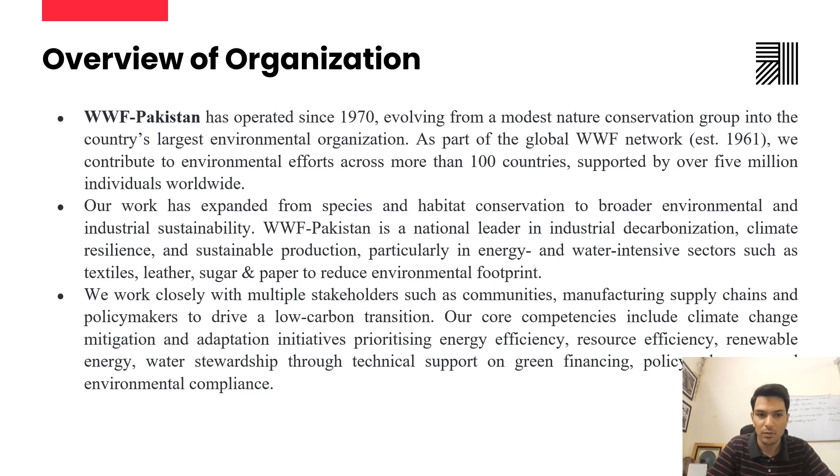The solution that we propose is that we want to bring about the change by diverting the load from the fossil fuel based energy demand to electrification, and our electrical grid is low emissions, so we want to have the heat pump integration as a scalable and cost effective decarbonization strategy for Pakistan's textile sector, which will ensure economic, environmental and reputational gains.

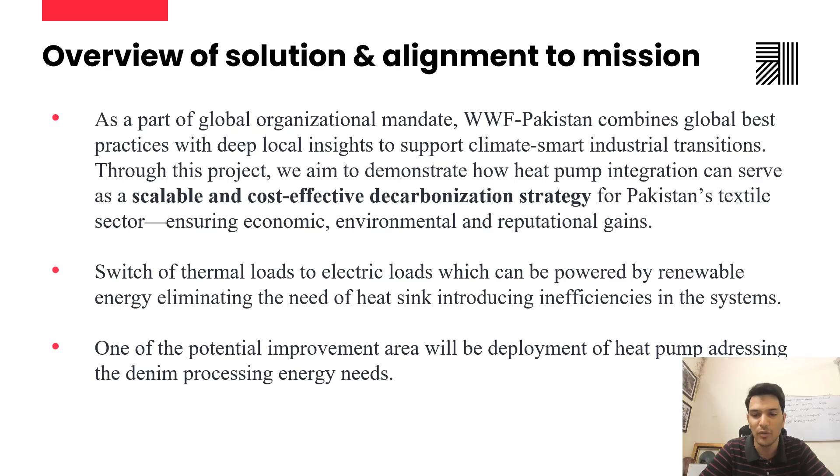So the primary objective of the solution is to shift thermal loads to electrical loads, because the thermal loads result in higher GHG emissions in contrast to the electrical load, which is mostly based on renewable energy or from the grid, and the grid has lesser emissions because we have a greater chunk of production from the renewables. So one of the potential improvement areas will be the deployment of heat pump solutions in the denim processing.

So the grant project aims to conduct a detailed feasibility study which will comprise of site visits, meeting with the project team, collecting verifiable data, and we will be analyzing and conducting the on-ground surveys, and then we will carry out the engineering sizing of the heat pump solution, what size will suit for the electrification, and then this engineering design will help us assess if the proposed solution will be economically and environmentally viable or not. If the heat pump solution is found feasible, the project team will then provide implementation support to the denim mill through the vendor selection.

We have done our base work, research, and we are better positioned because we have a background of carrying out environmental energy audits in more than 100 leading exporters in the country in the past decade.

So after the performance review, we will build a business case for the wider uptake, because we have direct liaison with many of the textile associations in the country, and we believe that there is a greater chance of scaling up this solution for the wider uptake to the entire sector in their value chain, starting from the ginning, the weaving, then the textile wet processing, garmenting, and then cut to pack solution. So in the entire value chain, starting from the processing till the finished good, there is a great potential of environmental improvement in terms of GHG emission reduction.

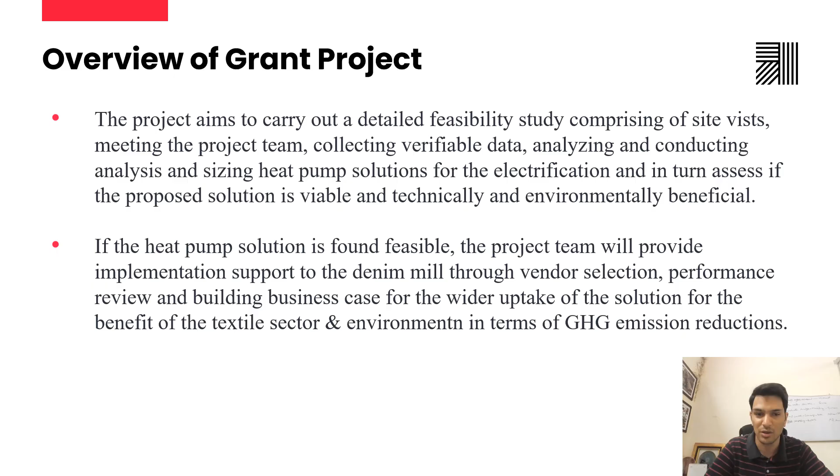So here is our project plan, the Gantt chart, which shows the list of activities that will be carried out. The first activity will be site investigations and data collection, and then we will proceed towards on-ground energy audits, which will be carried out at the denim mill situated in Karachi, and then the feasibility study and cost benefit analysis will be done, where we check the ROIs. The system design will be done: what size of heat pump will be suitable for electrification, what GHG emissions will it offset, and how will it go beyond the conventional solution.

Then the vendor will be engaged and the project will be executed from month 5 to month 11. And once it is done, we will have the performance evaluation of the heat pump and the solution. Once it is there, it has to be evaluated and the performance reports will be generated to see if it is going to deliver the intended outcomes.

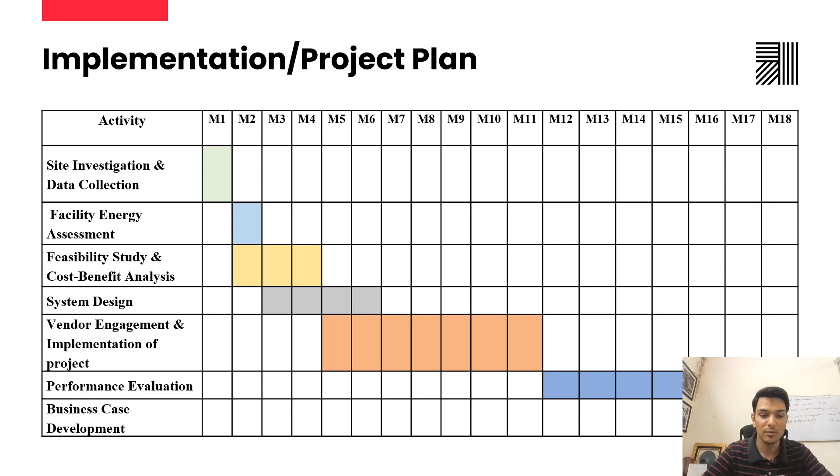And at the end of this performance evaluation, we will develop a business case with the project sites team, and then we'll have dissemination sessions for the wider audience so that they can take it forward and they can deploy it at the next level.

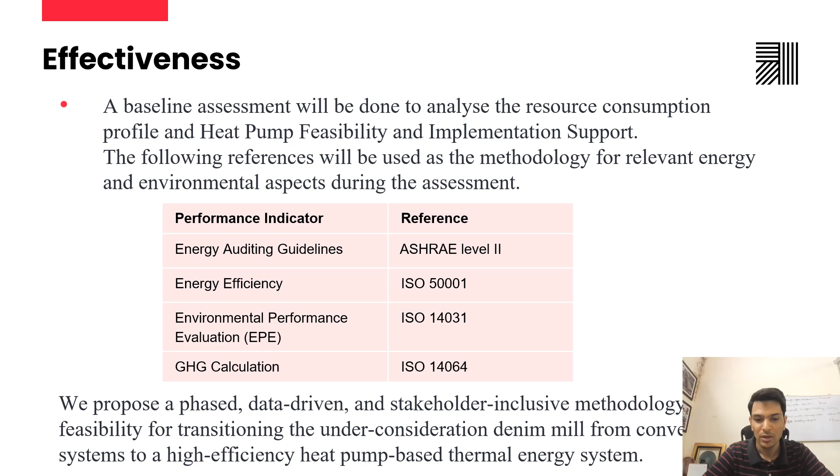The effectiveness is that a baseline assessment will be done to analyze the resource consumption profile and heat pump feasibility and implementation support. So we'll be making use of the energy auditing guidelines, energy efficiency protocol, environmental performance evaluation, ISO 14031, and then GHG calculation through the ISO 14064 standard. So we propose a phased, data-driven and stakeholder-inclusive methodology for the feasibility so that we can have the best solution on board.

This gives a picture of the different areas available, the overall energy and material map of the entire facility where we want to conduct this study. So you see here the natural gas consumption in terms of cubic meters, then the kilowatt-hour electricity consumption from the KE. KE is the Karachi Electric grid supply, and then there is electricity generation from solar PV as well. So currently the natural gas is being used to generate steam through the boilers, and then that steam is being used for water heating and other sources. And then the electricity is being used for space cooling, which is the business as usual.

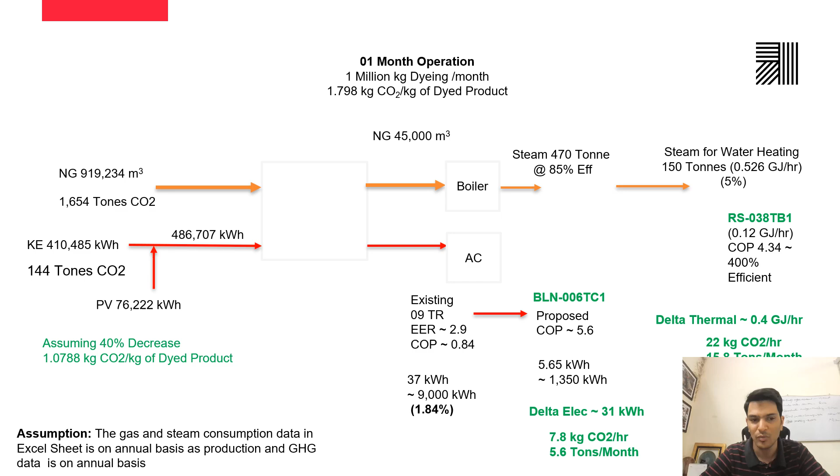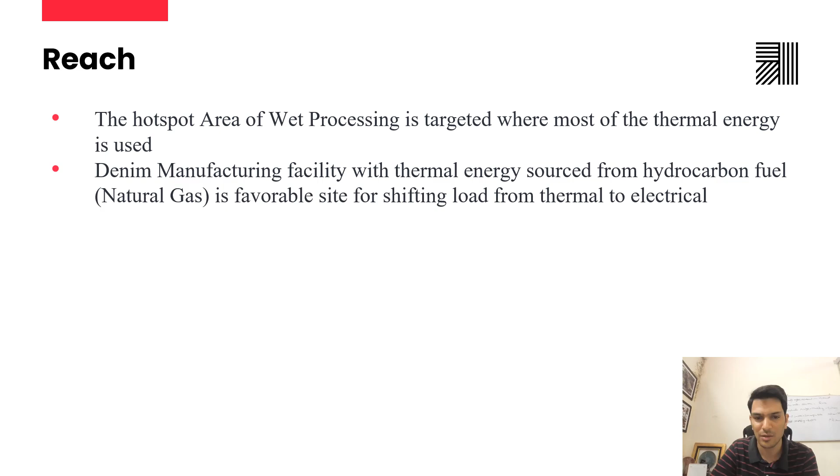So here the gas and steam consumption data is on an annual basis, and we have retrofitted it to represent the operations of 1 month. So this entire sheet represents the data on a 1 month basis, so that we have unit consistency. So the reach is that we want to have the hotspot area of wet processing. We are targeting that area, and only thermal energy is being targeted. You see on this side the thermal energy, there's a great potential. If we reduce the use of natural gas, then proportionally the GHG emissions will be reduced, and the organization will be able to save energy and the cost. So the facility will offset the GHG emissions resulting from the natural gas consumption on the thermal side.

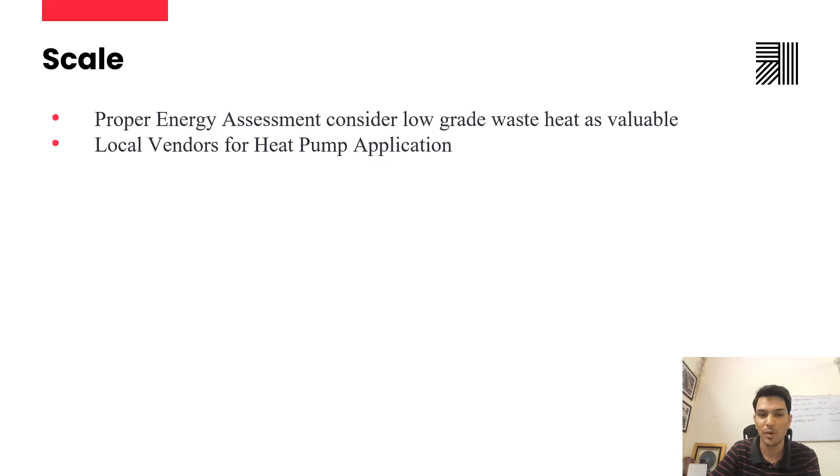So there is a great potential and prospect to scale this, and there will be energy assessments to consider low grade waste heat as a valuable asset, and then local vendors will be utilized for heat pump solutions so that this is not just one case, rather this is implemented across the value chain and across the sector in the country.

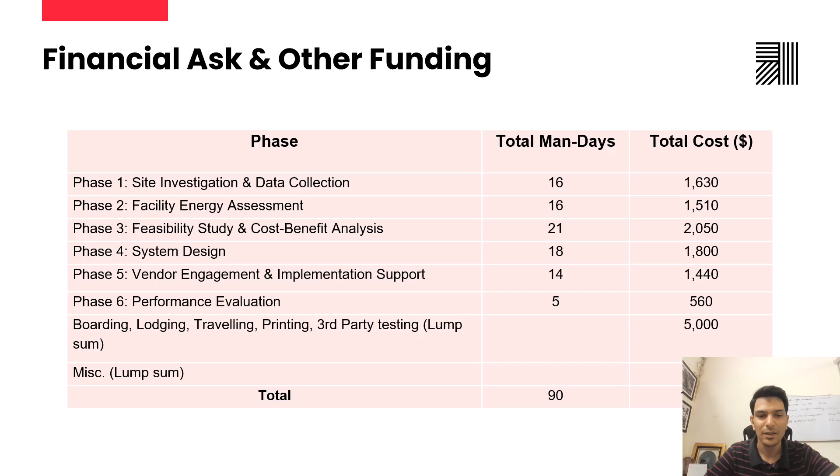So these are the financial asks. The details are also put up in our financial document which we have submitted to the Apparel Impact Institute, and mostly our work will be on the experts that will be deployed to carry out the investigation, site calculation, energy assessment, feasibility study, and system design. And some budget is being allocated for boarding and lodging to accommodate the expenses that are required. And in all we have requested 14,990 US dollars for this study so that we can carry out this and reach the ultimate objective of assessing the suitability of the heat pump for the textile sector.

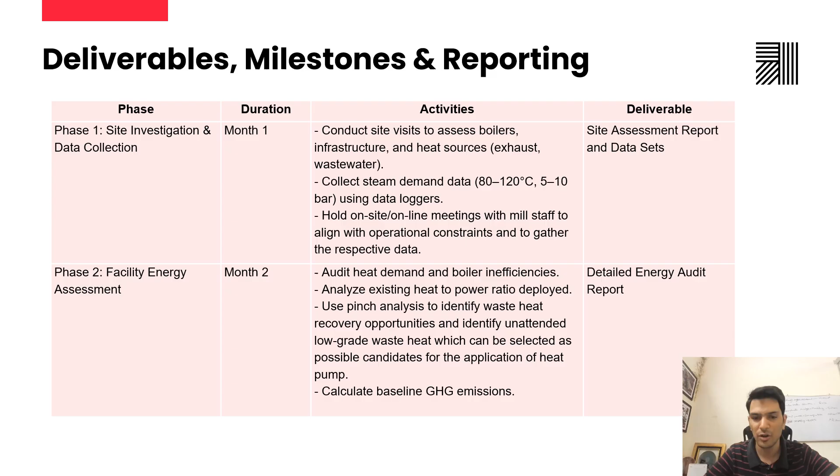So these are the major deliverables and their milestones have been given. The key milestones are a site assessment report in the beginning, then we'll have a detailed energy audit report. Once the audit report is there, we will have the detailed feasibility report, which will comprise a simulation of heat and mass balance, modeling the heat pump performance for steam production, because steam is the major chunk which is used in textiles on the thermal side. And then the comparative analysis will be there, with the capex, the opex, and ROI. The economic side of the project will also be explored in this report.

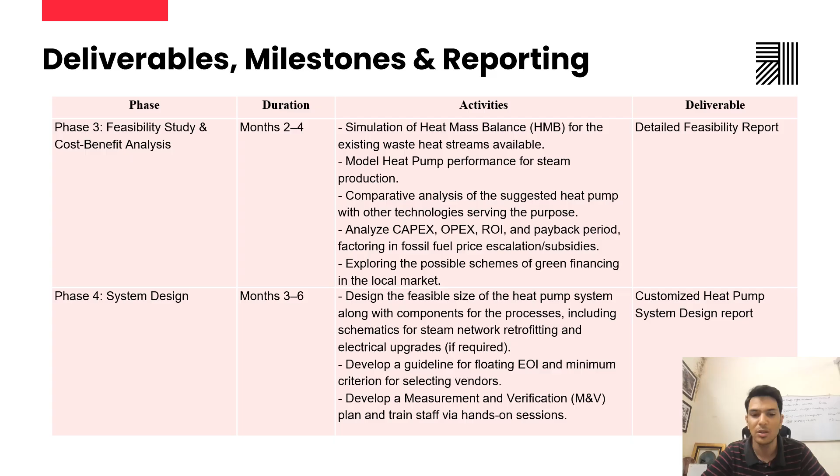If the heat pump solution is deemed feasible, then we will move towards a system design, taking into confidence the Apparel Impact Institute as well as the client, which is Artistic Milliners. And then we will move further, where we will have the detailed design and measurement and verification methodologies, the guideline for floating the EOI, and minimum criteria for selecting the vendors. Once this is through and we secure the funding for implementation of the project, then the vendor will be engaged. The vendor will be selected based on the criteria given in the feasibility report, and the technical aspects, after sales services, and their performance will be analyzed, and then the final vendor will be selected and mobilized to deploy the solution.

Once the heat pump solution is in place, then from months 12 to 16, the performance will be monitored on a periodic basis. We will have the measurement and verification of the achieved benefits, and then identify further optimization opportunities. Once this is done, in months 17 and 18, the final 2 months, the technical results will be shared and a case study will be developed for wider dissemination, so that the other major textile sector players, the export sector, can benefit, because there is a great thirst and demand among notable textile sector representatives in the country to move towards sustainability initiatives, and this offers a great promise for them. So that's all, and we believe this proposition has great potential for upscaling and faster uptake by the industry leaders. Thank you.